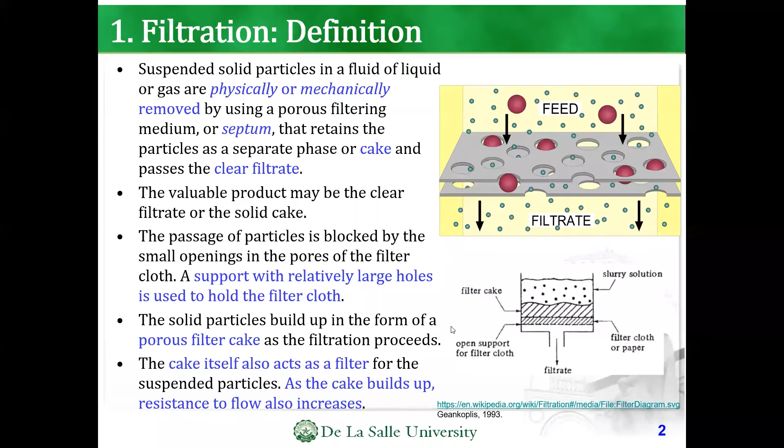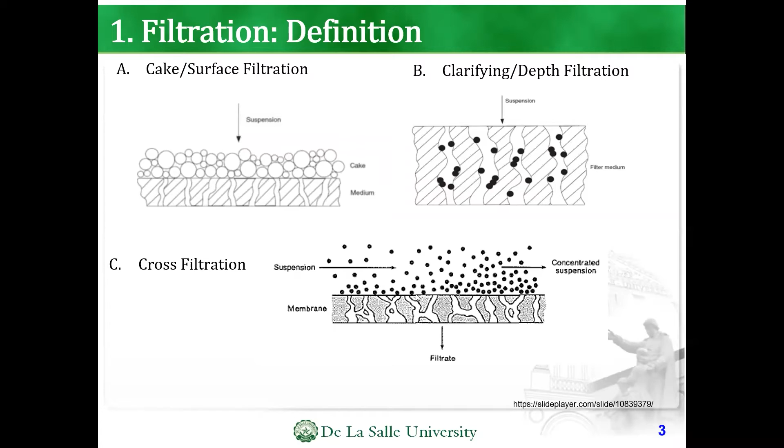And there's what you call cross filtration, wherein perpendicular yung flow niya. So you have a membrane in here, and then the filtrate passes through the membrane, and the membrane does not allow the solid particles to go through it. There are several types of filtration. You have the gravity filtration, vacuum, pressure, and centrifugal. However, this will be reported in the types of filtration equipment.

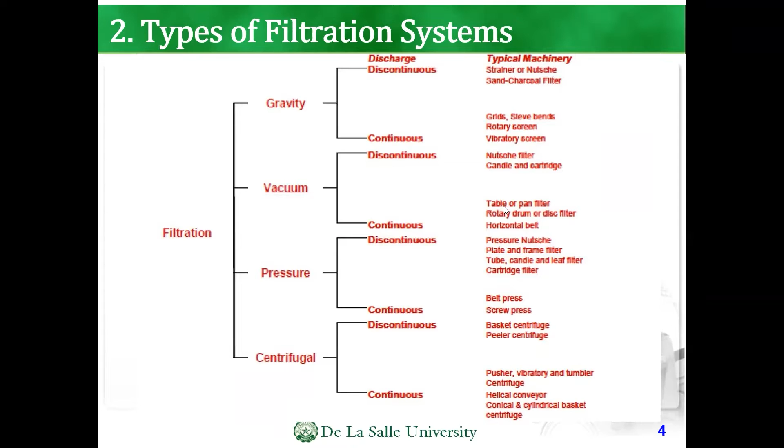So some types you can see here are bed filters. So the concepts will be explained in the report. However, one of the typical applications that you can see this in is in water treatment systems where you can see here, di ba, may mga layers of sand, gravel, activated carbon to treat the liquid system, di ba?

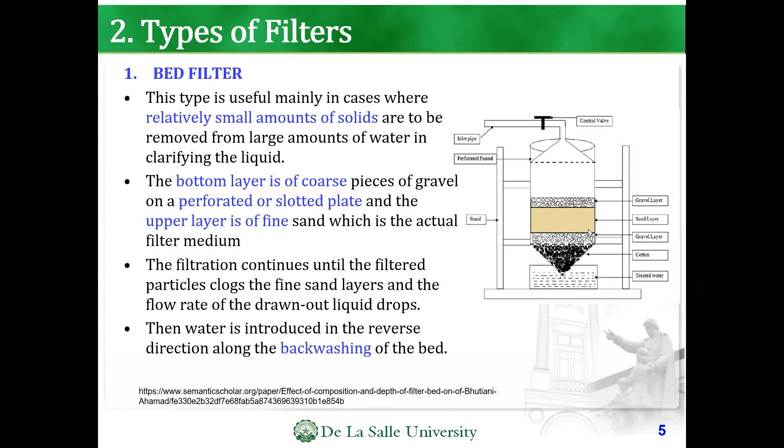And then you have the plate and frame. So you have basically a system of frames na may mga plates sa loob. So the plates would serve as the support for the filter medium. So ayan siya, di ba? It's a series of plate and frame na diyan dadaan yung suspension to be filtered out. So some important terms naman that you can see are in here.

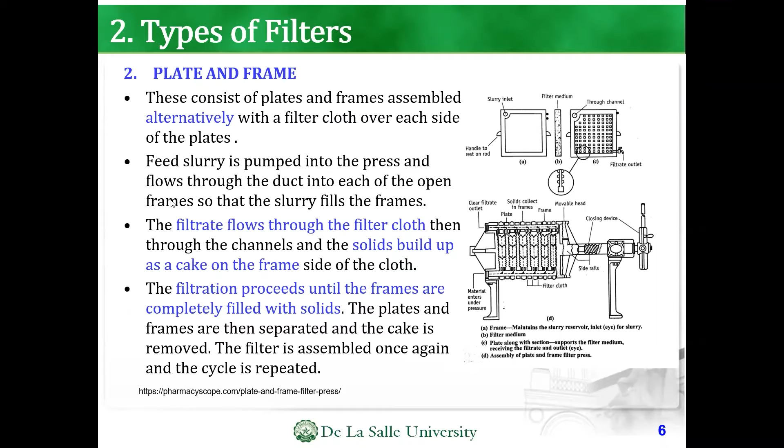And then the leaf filter. The difference is that in the leaf filter, it starts out as ito. It does not contain anything. And as the slurry goes inside, lumalabas pa sa dito, parang there are holes here, and then it would go out on top. So you can see in here, for example, there's a slurry, tapos nagbi-build up dito. So the filtrate would go there to be sucked out. And of course, the built-up cake can be taken out at the bottom.

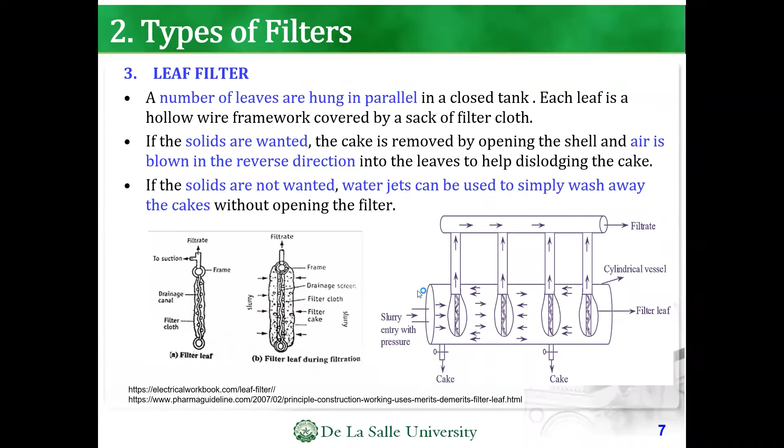And then the rotary drum filter, this one's really common. Kasi this one, what you can see here is may pang scrape or a blade placed here on the side so that as it rotates, kasi this one is hollow, and then the filtrate goes inside, typically may suction or may vacuum pump. As it rotates, it scrapes out whatever's built up in there. So basically, that's the rotary drum filter.

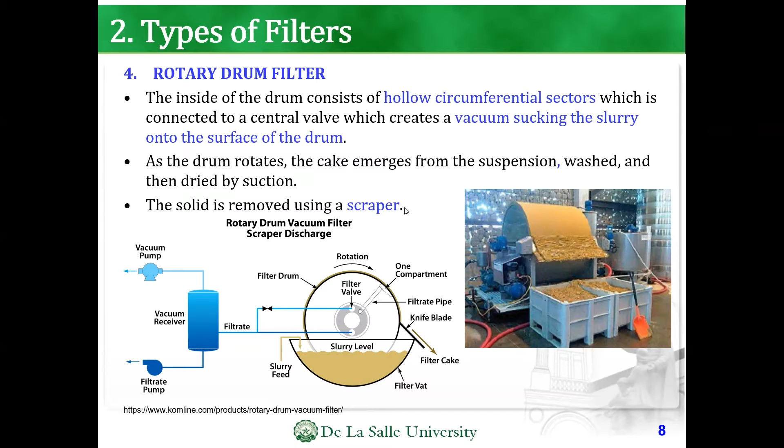All right, so let's go basically to the principles of filtration. So we have material balances on the filtration system. Over time, as I have said earlier, the filter cake is being deposited on the filter. So for example, this is the feed. It contains the filtrate and the solids. So CS is the amount ng solids. So basically, you have here the cake composed of solids plus some retained filtrate.

And then yung product natin, ang gusto natin in this case is the filtrate. So simultaneously, they're being accumulated. So volume of the product filtrate is being collected. The feed is a mixture of solids and filtrate, as I have said. So in the filtration operation, there are basically two resistances. Isa, resistance due to the cake, and then the other one is resistance due to the filter medium.

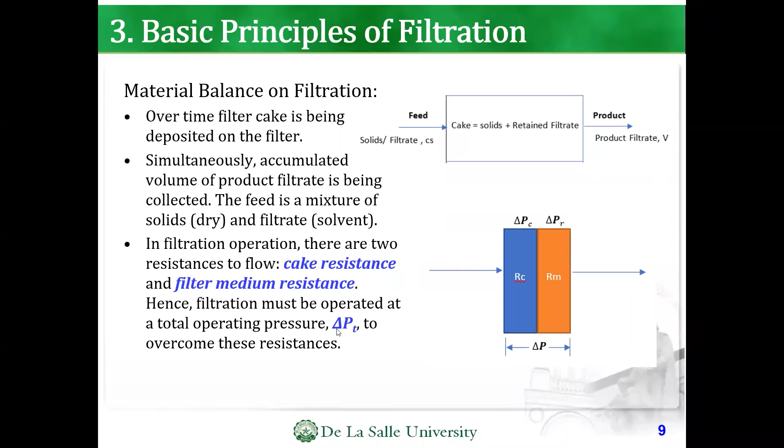So RC and RM. And because of that, there's a pressure drop due to the cake and pressure drop due to the medium. So sometimes it's PM or PF. It depends on the naming. So the total pressure drop from the start until the filtrate comes out is total pressure drop PT, delta P. So let's go to the basic concepts lang.

There are two types, constant pressure filtration. It's basically the pressure drop is held constant while the flow rate is allowed to fall with time. Okay? Now, can you think, why is it na yung flow rate bumababa siya? Yung slurry niya nagiging thicker, tama? Kasi syempre, di ba, kumakapal ng kumakapal, para yung pressure niya hindi masyadong mataas, yung flow mo, bababaan mo to counteract that.

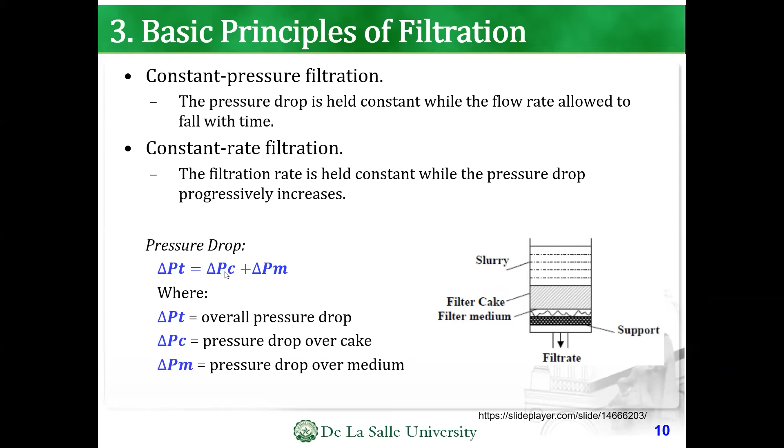And then in the constant-rate filtration, you would want to have naman a constant volumetric flow rate. Di ba? Constant capacity. So, in order for you to have that, yung pressure drop mo naman pataas ng pataas. Kasi syempre, nagbi-build up yung cake eh. And then as I said earlier, the total pressure drop is pressure due to the cake plus pressure due to the medium.

So, consider a section through a filter cake and filter medium at definite time t from the start of the flow of the filtrate. So in this case, at this time, the thickness of the filter cake is L. So, ito yon yung L. The filter cross-sectional area is A, di ba? Yung cross-sectional area niya, yung perpendicular to the flow.

And the linear velocity of the filtrate is V, or sometimes you can see this in books as letter U, in the L direction. So in the direction of that total length. So for a laminar flow in a packed bed of particles, we apply the Karman-Kozeny equation. So basically, guys, you will notice in here that in the formulas here, succeeding formulas, I included gc.

Kasi in some books, may gc. In some books, kapag SI, walang gc. So ako, honestly, in order for me to avoid yung mga correction factors or the proportionality constant, I typically use the SI units. However, in the event that you're asked to write it or solve it in the English system,

the way I remember the formulas, kasi when I saw this in the books, the gc, you'll notice, di ba yung gc katabi niya lagi yung mga P? So here, gc is parang katapat lang niya rin yung P. It's not on the opposite side. So here, delta P over L is K1, where that's a constant, 4.17 for random particles.

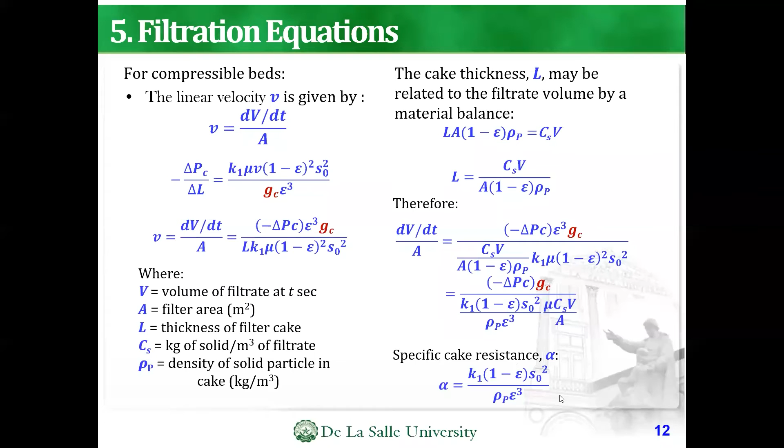This one is basically just some derivation. In order to solve for the specific cake resistance, do take note of the formula in here at the bottom. I have in here naman in the previous pages the descriptions of those letters. So with this, they're just basically derivations lang naman, as I said. And then you can see naman, di ba, like this one, the resistance due to the filter medium is the delta P_M gc over. So nire-replace lang siya. And the important thing here is this one, the Ruth equation. This is the basic filtration equation natin.

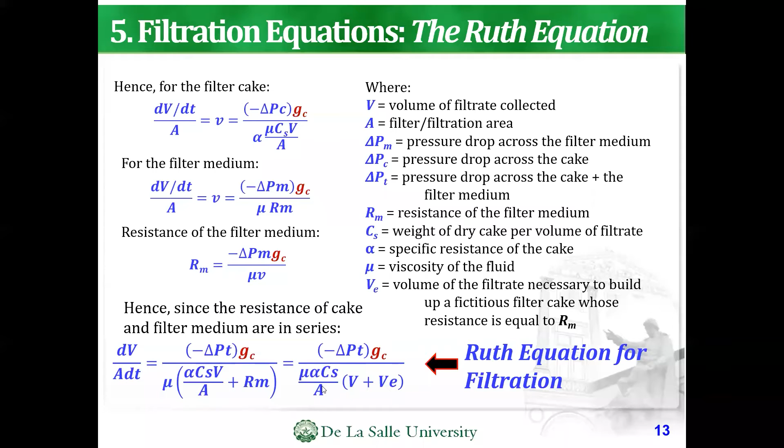So basically, the bottom terms here, yung mu alpha CS over A times V plus VE here, when that's converted, that is actually 1 over A dV over dt, that's the filtration rate, is equal to the change in pressure over the viscosity times the total resistance. Resistance due to the cake and resistance due to the filtering medium. So as a guide, this is actually our general equation. General filtration equation. However, in this case, pinagsama niya kasi yung dalawang klaseng resistances.

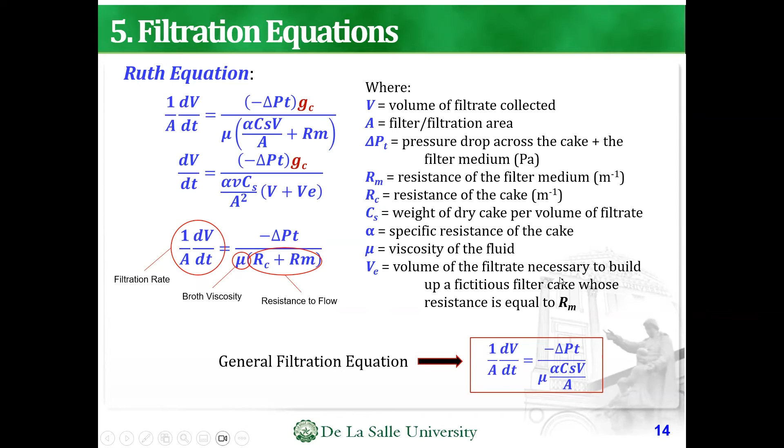So, here, it's just showing na ito yung typical filtration equation. However, as I said, here are showing two resistances. Sorry, yung M na to, there's supposed to be subscripts. Nag-e-error sa Excel eh. So, you can see in here naman what they mean. And then, here, the volume of the filtrate can also be related to W because sometimes you might be given weights. So basically, yung mass fraction times volume, di ba? Parang nire-relate lang natin siya sa weight. And then the specific cake resistance. So this formula is also important because at times, we might ask you for the specific cake resistances.

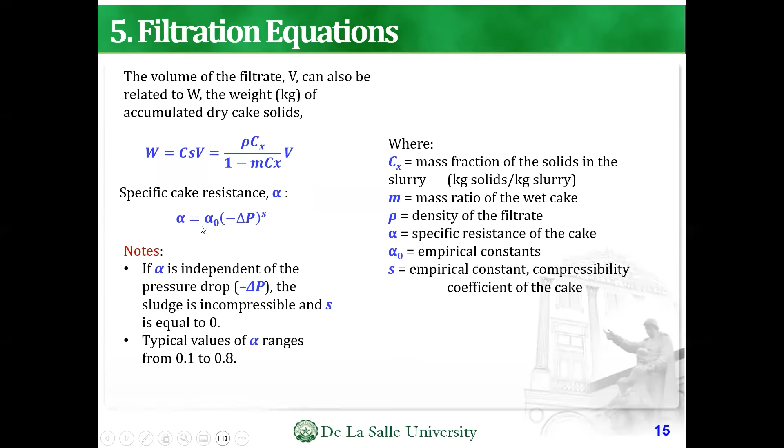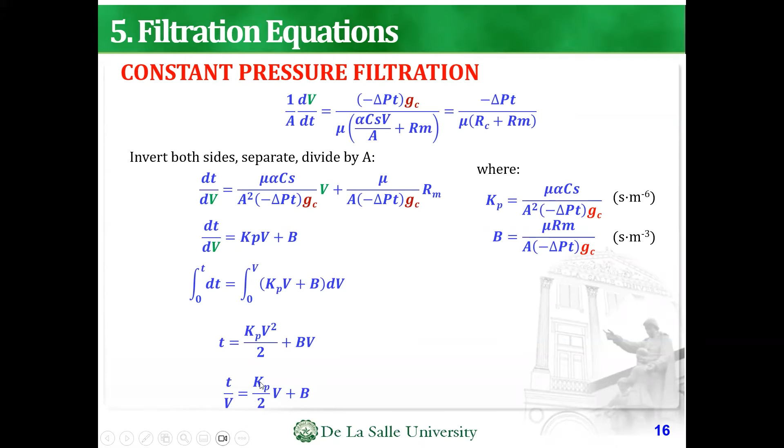And ito yung last two that are important. For constant pressure filtration, basically using that same concept, what we did was to separate the terms, and then this one, the whole term in here, is actually equivalent to Kp. And then this whole term in here, yung katabi ng RM, the whole term there, is actually your B. So that it can be linearized. Diba? So when we integrate this with respect to V, the other side's t, the time of filtration can be solved by Kp V squared over 2 plus BV, or para malinearize siya, divide everything by V. This one is the intercept. This one, Kp over 2, will be the slope. And then the Y should be t over V.

So with that, there are two types where we can solve yung dalawang rates niya. Isa for leaf filters and then isa for plate and frame. The only difference is that since ang plate and frame natin, basically dumadaan siya sa two sides, and then the area, di ba, it's proportional to the square of the area. So parang two times naka-square, magiging 1/4. So basically, those are the formulas.